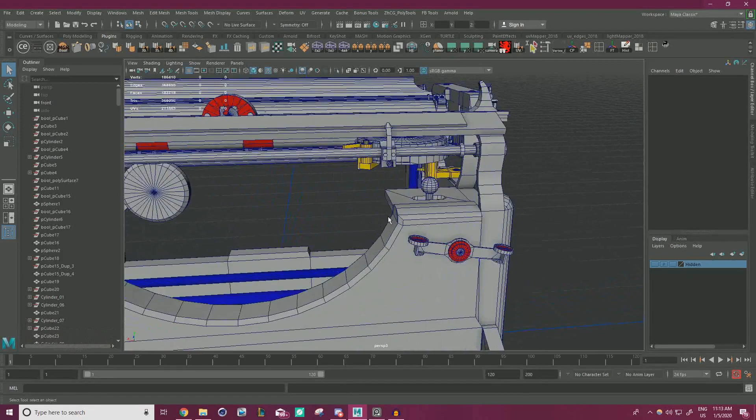We're going to be able to finish everything off on this right side, mirror it over, and then we'll call it a day. But that should keep us busy for quite a while.

So last time we finished everything that's yellow minus this top piece, as well as this circular part. We opened it up so the ribbon can slide through, and we'll get to that in just a second. But we also finished all these connection pieces over here, and as I was looking into some more reference, it looks a little bit more complex. I like how it has these different parts breaking into it, so I'm going to do a little improv to get these shapes back in here.

I'm going to keep this tube the way that it is. I'm just going to add additional parts where it would naturally be connecting. So let's go ahead and do that. I'm just going to duplicate that, scale it down, because it's very simplified, and I'd like to add a bit more complexity so it seems more believable, like there's more mechanisms going on. So let's move our pivot down here and snap this down.

I'm essentially just adding pieces to make it look like there's more going on. I don't want this long tube to be lasting too long through everything, so I'm going to pull this down, getting this sort of layered effect. Ours is going to be a little different, but that's okay.

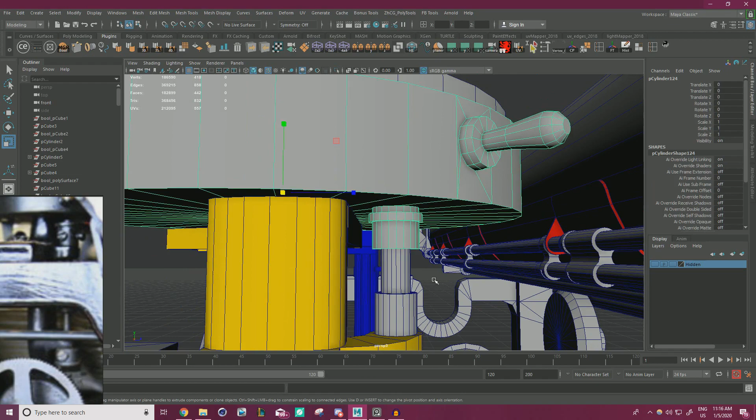But yeah, let's get back to this guy. So I just want to add these little screws in, and then there's something similar at the bottom, so we can just reuse this. And then we'll move back on to the next part.

But for this, super simple. We're just going to add some booleans, and then plug them with some screws.

So let's snap this so it's level. Rotate it 90 degrees. And it doesn't really have to be perfectly in the middle or anything, so I'm not going to add a cut. The middle height wise, that is.

Let's put one at the bottom, duplicate, rotate. For this one, I'm going to shrink it down, just to add some variety. And just sort of find another place where it's nice to line up.

Something like that. I'm making sure they're going all the way through so I can just add stuff to both sides. I'm going to combine these before we do a boolean, just so we only have to do it once. Let's freeze all our transforms and history on these guys.

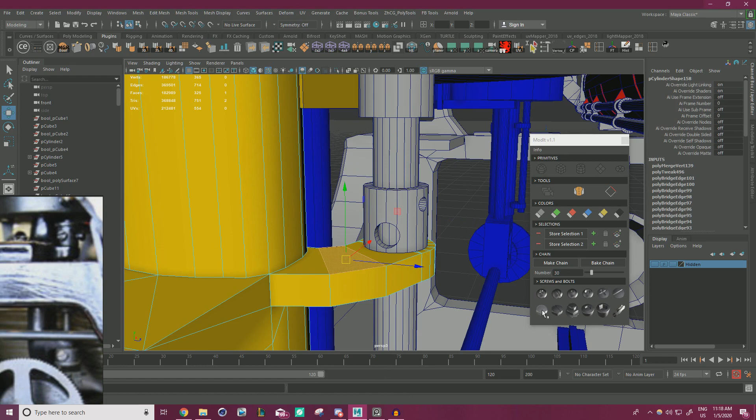Let me just find a place to put these. I might just go for something like this, just because I know it's different and I can extrude it out a little bit. I'm going to rotate that 90 degrees.

Make it red so we don't forget about it. Just snapping it to various vertices to make sure it's totally centered. So I have that sticking out a little bit, which I like. We can just duplicate that with a Control D, bring that to the other side, and rotate 180.

So this is all going to be baked down anyways, but nice. As for these guys, I'll just use a normal screw. Chances of anyone even looking at that specific piece is so tiny, so I don't mind it being like this. It's nice to have a lot of repeating parts throughout, and these screws are placed completely throughout our entire thing, so it's nice to keep that consistent.

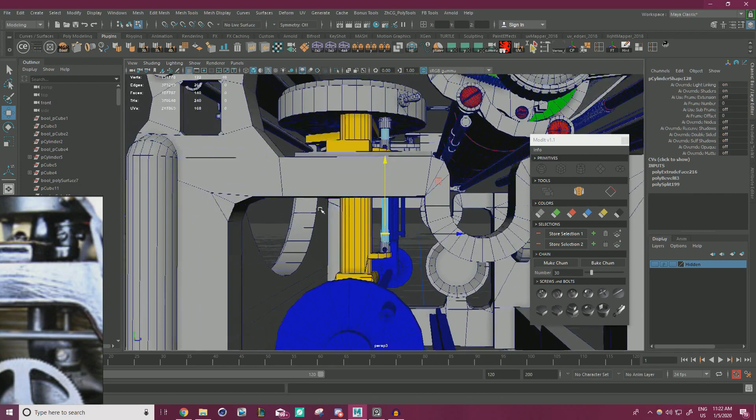And then yeah, just to make it a bit more interesting, I'm gonna add a cut about halfway, bevel it, because you can kind of see it here. But there's like a thicker part to it, so I'm just gonna extrude that. I kind of like how it looks extruded in with a minus 0.05. Something along these lines. So I'm going to keep it like that, and we're going to call that part done.

Let's go ahead and move on to this contraption. So referring to this guy again, it just kind of seems to be this sort of metal piece that hooks around, holds this turny piece, and has like the ribbon feeding into it. So obviously that's a bit simplified, but we can still work with that. Like this, for example, seems to be set up pretty properly. So we can just kind of have a curved piece that just stops here, and then these guys are just resting on top. So that's simple enough to put together.

Just trying to think of the best way to do that. Delete this piece. Pull this guy in a little bit, and then we can extrude it out and rotate it like 45 degrees and have it...

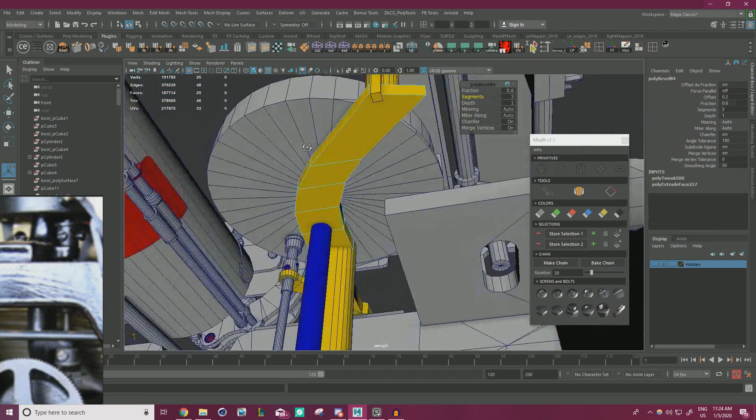I'm gonna bevel this. Yeah, so I want a nice smooth... Maybe that's not quite it. Let's bring this back. Instead, we could add a cut

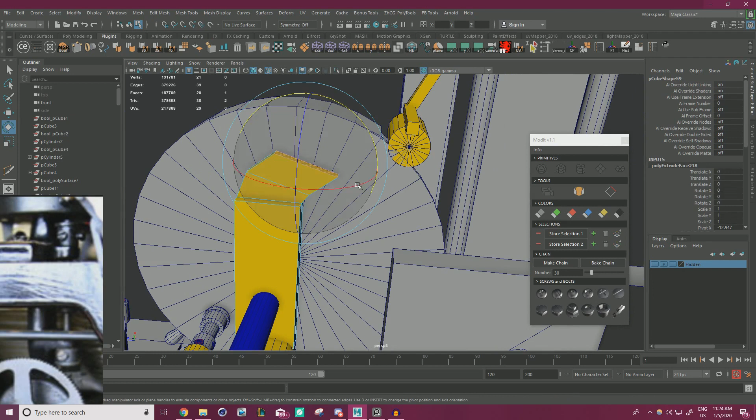and just sort of have a thin layer coming out. I'm just going to gradually move this and rotate. And I'm just trying to see what's going on here. So that's kind of the setup they have.

But it kind of seems that this piece that's coming out is just to hold the ribbon. This rounded piece is actually welded to the bottom plate. So that gives us something more to work with.

In that case, I'm going to want this to be a lot thinner. So I'm just going to cut that again. Let's just do very chunky extrudes and rotates. And then we just kind of want it resting out here.

And of course this needs to be smoothed out a little bit better. So I'm going to go ahead and bevel these. Just sort of mess with the vertices so they're a bit more averaged out.

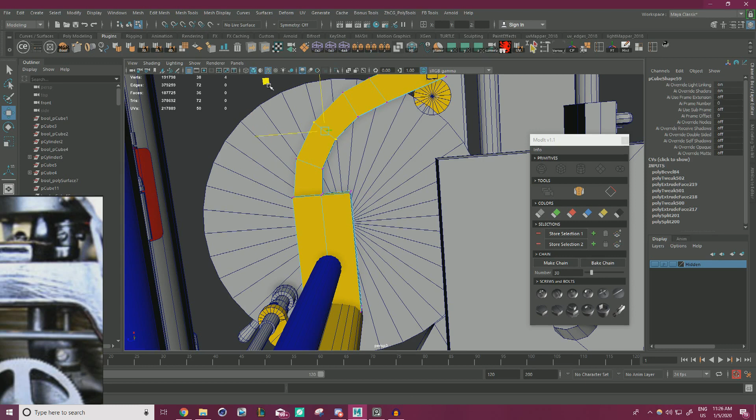Square off the end there. And this is a nice place to sort of keep, yeah, like two pieces. Let's go ahead and... we can even, if we grab these two faces and change our moving tool to, or our scaling tool to component.

Maybe not. Just trying to make this part wider. If I grab this and change it to component, it's not totally accurate. I suppose we could grab these two and hit extrude. Yeah, and that'll do the trick.

So now if we isolate this guy, so I'm just trying to have it be a bit wider at the end. Just so there's more room for everything to rest on.

Merge those guys since we have vertices just chilling on top of each other. Let's pull that in and rotate it so it's a bit more averaged. And then we can extrude that wider piece out now. Perfect. Okay, that gives us plenty of room.

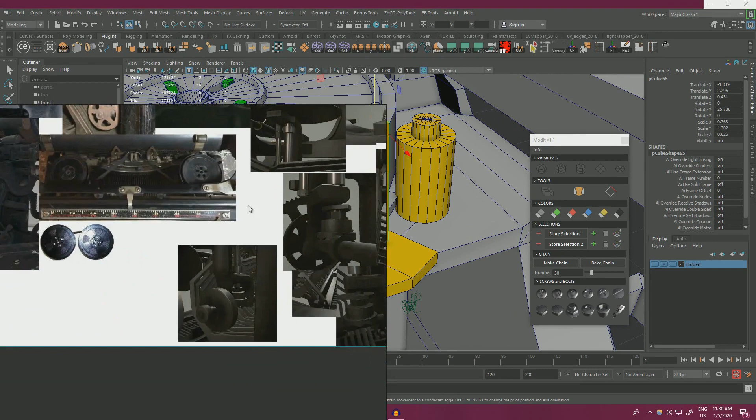Let's see if there's a clear shot of exactly. Yeah, this was one of those pieces where we kind of had to rely on that 3D model because it's so hard to see what's going on in there. That's okay, I'm just going to make it as I think would make sense.

A bit thinner, shorter, and then I'd imagine they'd be kind of tapered in a little bit. And then might even have like... oh, we got edges on this side. Weird, let's get rid of those. But maybe even a bit of a sharper shape like this, just to indicate that something's supposed to go through.

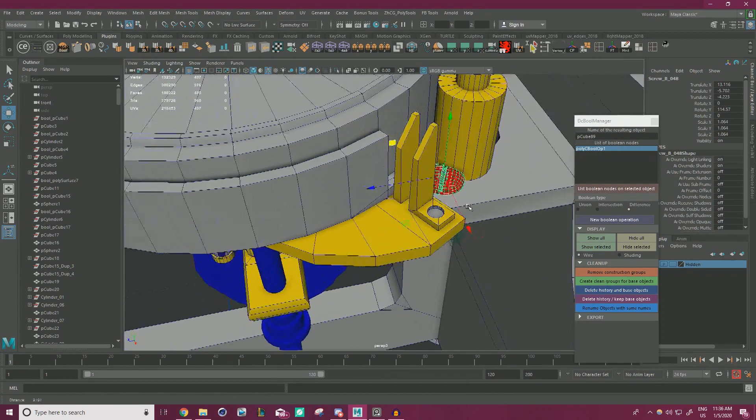I'm just going to poke face here, just so I can quickly snap this guy to the center. Save us a little bit of time. But yeah, I like how that looks, little details like that go a long way. That's why I wanted to stop and sort of set up this first part before we tackled this.

But that's that piece. Now we need the little rounded piece to be faceted on. I think the best way to do this, and this is of course building off of this idea, is it sort of has like a rounded piece on the bottom and the top and a piece going through. So I'm also going to borrow from that idea.

And select all the faces on the top and bottom. We can extrude this in a little bit. Delete, we're just making another pipe here. Bridge these guys through. We can sort of anchor this somewhere. I'm going to scale this down, as well as the inside.

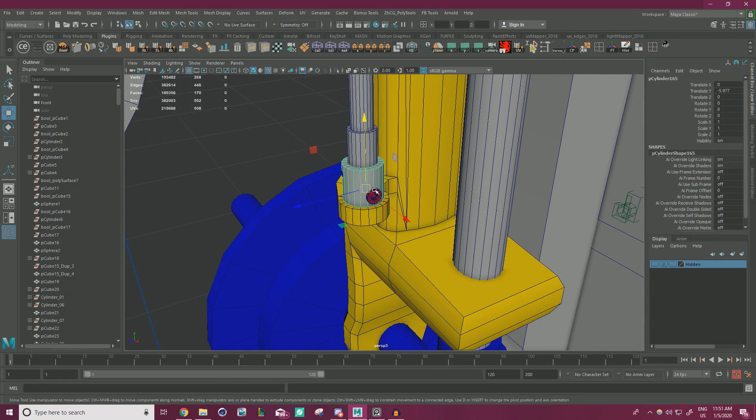Should be able to just copy this over. Let's put it in a group, and by putting it in a group, we can grow and shrink it as one.

So I'm just going to snap it to the bottom, unhide that, grow it like so. And let's rotate it a bit so it's not the same.

I'm also going to grab these bottom faces and extrude them with a rotation to sort of match this bottom angle.

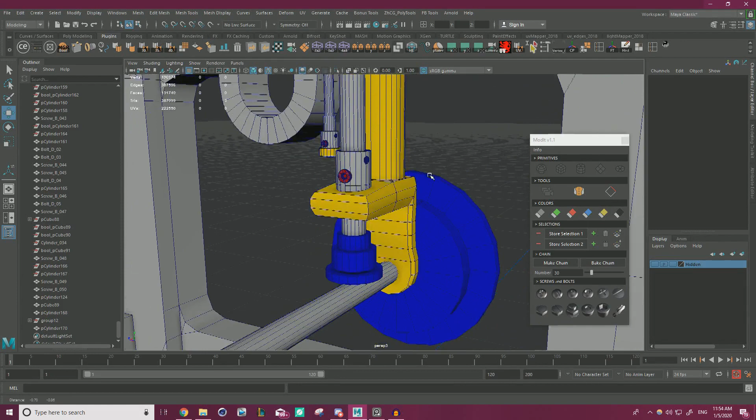This guy seems like it was a bolt, so I'm just going to borrow this bolt. I'm just making a bolt and connecting it all the way through.

A good way to do this is to just bridge and then delete the middle, and select these two guys so I can snap this to the middle.

Yeah, the 3D model I'm looking at had a bolt here, which is easy enough, so I'm just going to put a bolt there.

They have this one as just a large piece of metal, but this is another one of those cases where I'm like, okay, this is clearly a simplified version of what it should be, so let's give it a bit more visual interest.

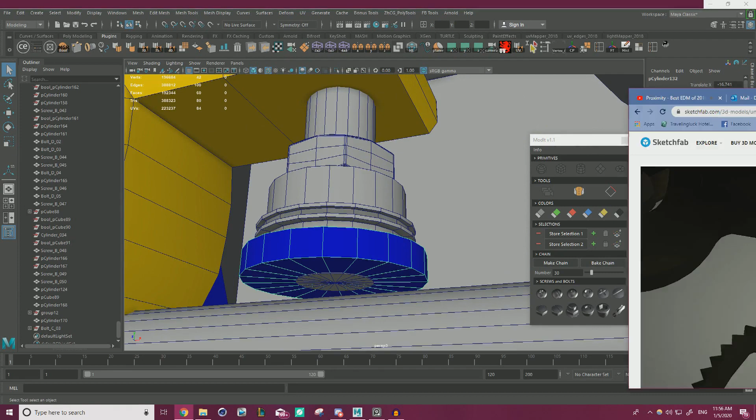Looking at how this guy has it set up, it's like some sort of gear mechanic that's going on. Like, yeah, you twist this, which rotates this. That all makes sense, so we're gonna have to make something similar to that.

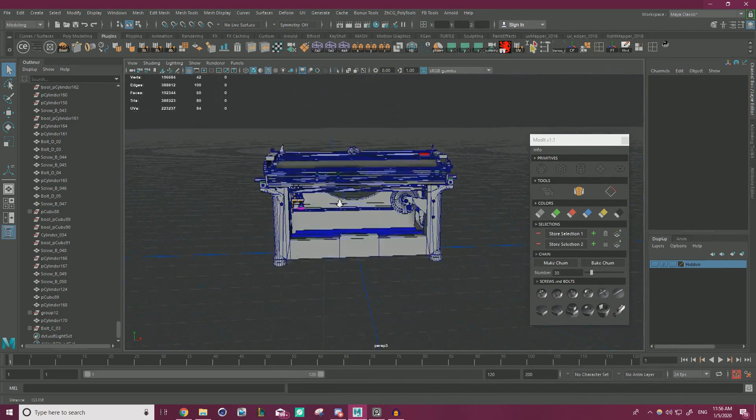Spiky shape, we might have something to borrow from for that. I guess this is rotating horizontally rather than vertically, so it's not really the best case, because the way that they have it set up is just like literally every other one being pulled down, which we could do, but I kind of want to build off of that a little bit more.

What I'm going to do is bring in a new cylinder. No, let's delete that, let's bring in a new cylinder. Yeah, with 28 sides, I want a bit more geo for this. Actually, screw it, let's just go create polygon primitives, cylinder.

Give it 36, 36 subdivs. I'm going to snap it directly where the other one is, but delete the other one. Let's get this guy into position.

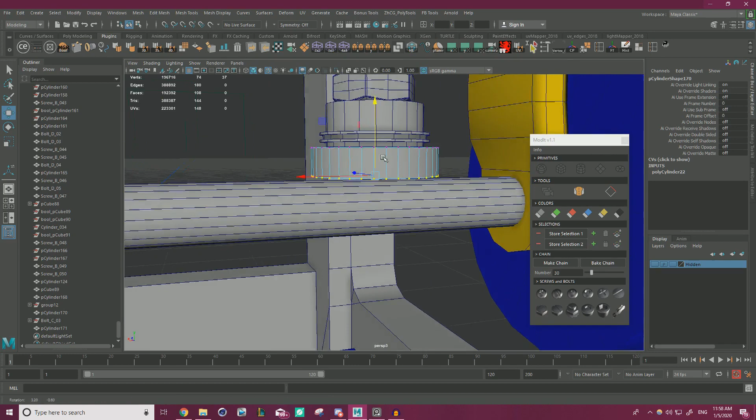So what I'm thinking for this is we could hollow it out. I'm just extruding the bottom and scaling it, pushing that up. Now we can select every other edge. I have to say, this is something you can do in Max that I was just shown by a coworker how to do - select every other edge, and I find it really useful. I know there's definitely plugins for it in Maya, but I'm surprised there's no default feature for that. I'm just essentially grabbing all those and rotating it a little bit, just because I think that looks a little too uniform.

But I don't know if that's any better. If I turn off wireframe... maybe just a little bit. We'll go with that. We'll shrink it down though, so it's kind of hugging the shape above it. Pull it up. Let's give it kind of like a ring around the lip, so I'm just adding an edge, flattening it out.

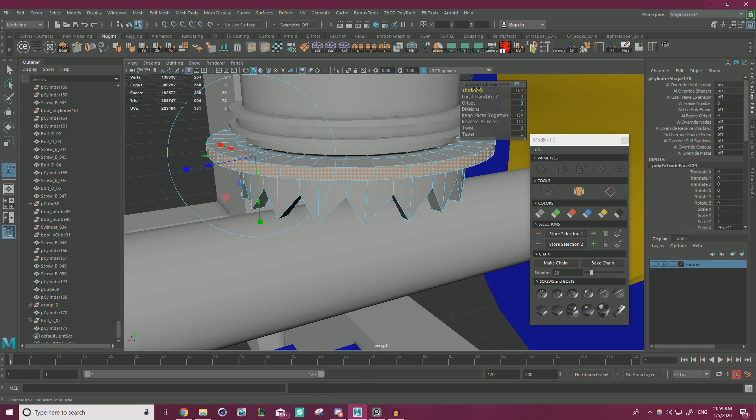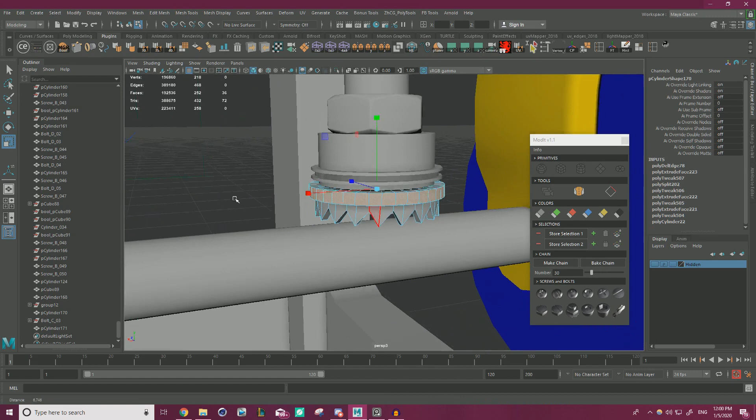Control delete to get rid of that. Kind of like the look of that. It kind of looks like it's acting as a safety mechanism, like it's harder to get your fingers down into the sharp bits. Just make it red so we don't forget about it.

Yeah, and essentially we just have to duplicate this guy over, put a corresponding one close to it. But I think we're gonna have to scale this one down quite a bit - which doesn't really work with gear logic. It kind of has to be the same size, doesn't it? Let's get it back to the correct size.

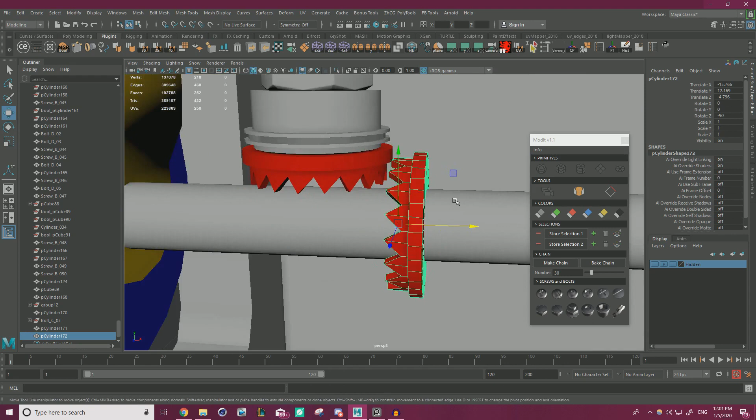Yeah, if we shrink them together, that should work. I'm also just going to push this up - I still like it hanging out the bottom. No one will ever see that, but that's okay. Yeah, and this is what I mean - now there's actually room for everything to fit into one another.

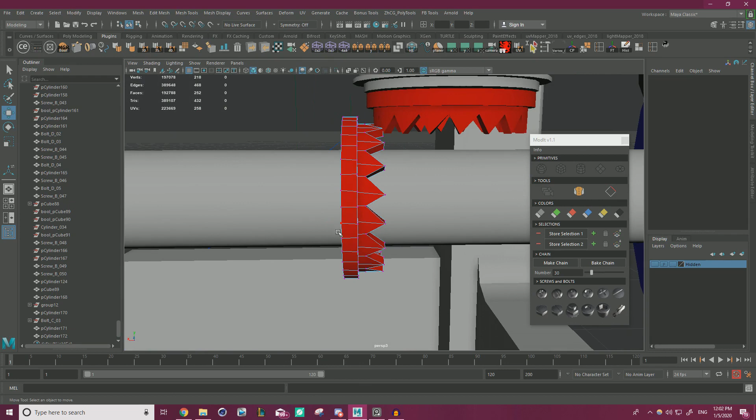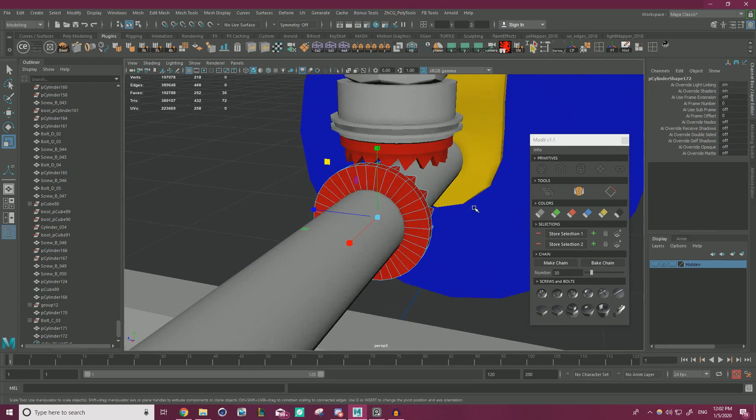With this, I kind of also - let's go into our side view. Kind of want to just select these teeth and pull them out a bit more. And then we can even extrude it all closer. Okay, I can work with that. It's definitely not my favorite, because I'm not exactly sure.

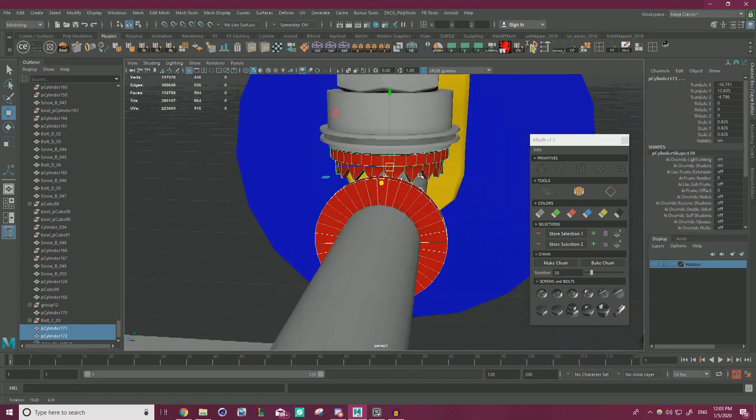It doesn't seem the most accurate, but we'll go with it for now. I don't even think you can see that piece unless you're looking through this grill. I think that's the only way you can see it. So I'm not too concerned with it, but if it does pose to be an issue, these two pieces are pretty isolated and not attached to anything, so it's a quick fix. At the very least, what I want to do is cut a hole through it.

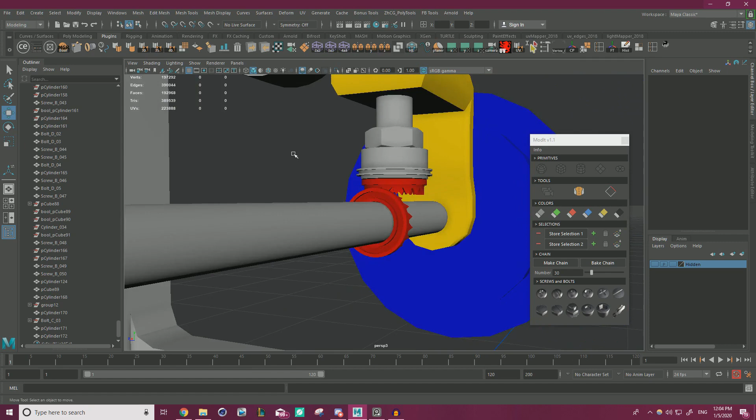Gotta make sure this is actually letting it go through. Nice. And then we have a lot of surface area here, so let's break it up by kind of beveling this in or something. Yeah, that looks a lot better.

Still not perfect, still not super happy with how that turns out, but who knows, maybe it'll be so hidden away you won't be able to tell, because realistically, even when you're looking at it, it's going to be this close and you can't really see the part, and even at this angle it's only going to get about this close to the camera, and that stuff's lost. You're not even looking at that. Okay, we'll leave that as it is.

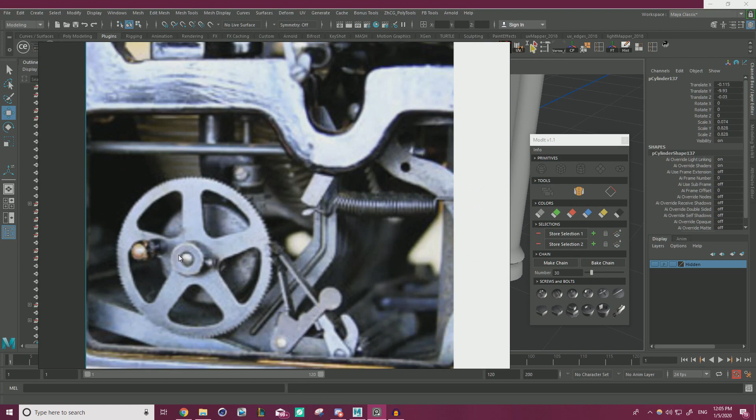We have these pieces, which should be a lot quicker, and we have actual reference for these. So this wheel is essentially like a plate and then a wheel, and the wheel has a little handle on it. This plate I've seen depicted a bunch of different ways - I've seen some of them closed off like this, and some of them more open and hollow like this. But this one definitely seems to be closed off, so we'll make it closed off, which is about as easy as a shape really gets.

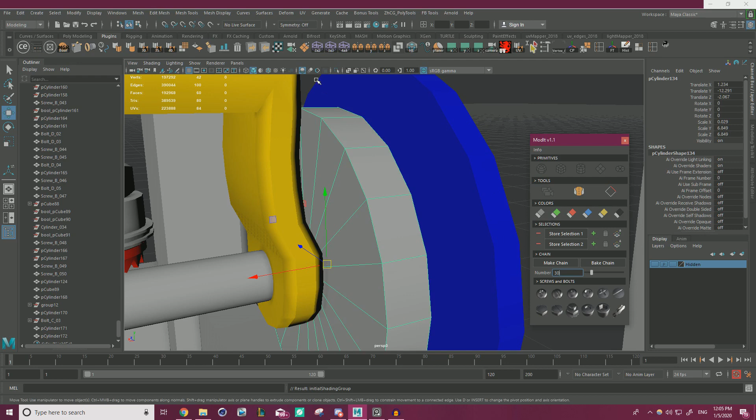So let's start working on that. Let's pull it out a little bit. It just kind of seems like a hollowed out, rounded cylinder. I'm going to bevel the end like that, and then just hollow this out. Control E, go to our scale tool. And that seems to be about it.

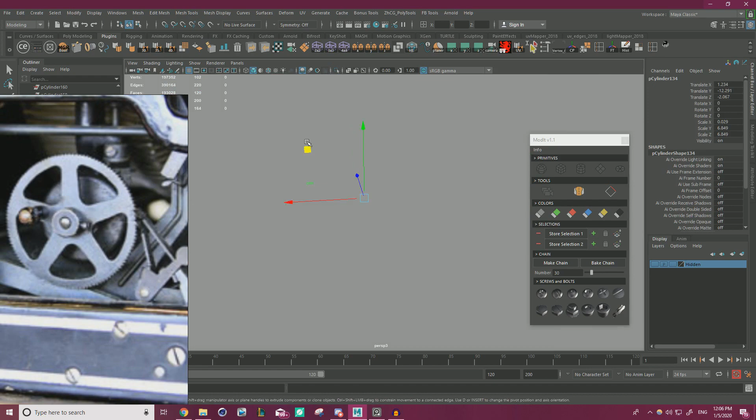Let's do an auto smooth. I mean, that's all I can really tell that it is. And then this, of course, punctures through, so let's carry that on. Just grabbing both sides, extruding, and we can bridge that.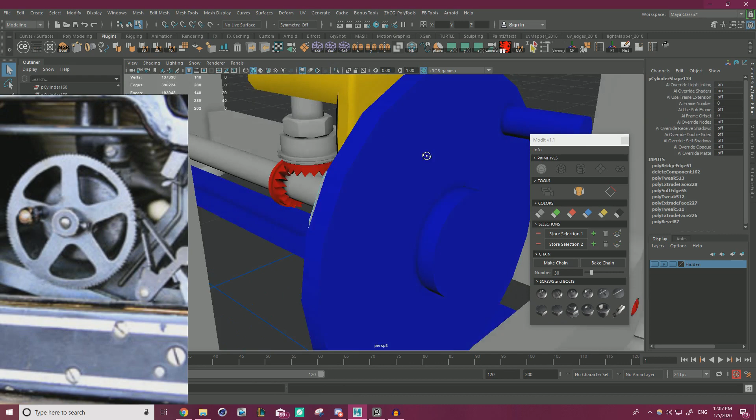Just have that going through. So that's that one. I think the other side also uses that same shape. So that's good. As for this wheel, it has teeth on it. We can borrow this—I think this is the exact same shape, isn't it? Yeah, we can just borrow this, should be the exact same gear.

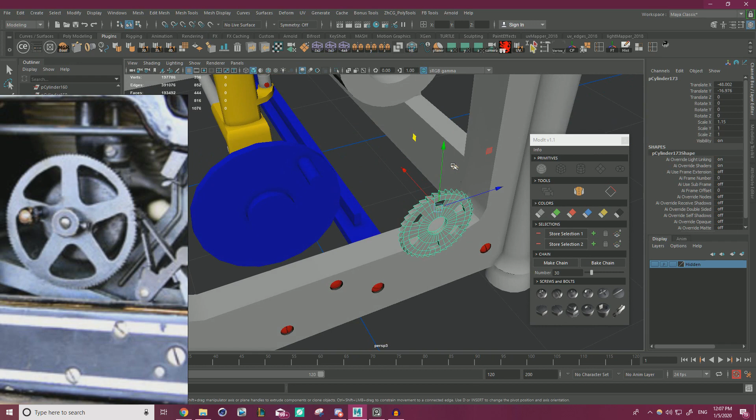This one definitely seems to have finer teeth to it. I'm trying to think if it's worth doing something like that though, because say we just scale this up, delete this guy out. I suppose it's not exactly the same. Yeah, it's different enough. I'm just trying to think of a quick way to get this pattern.

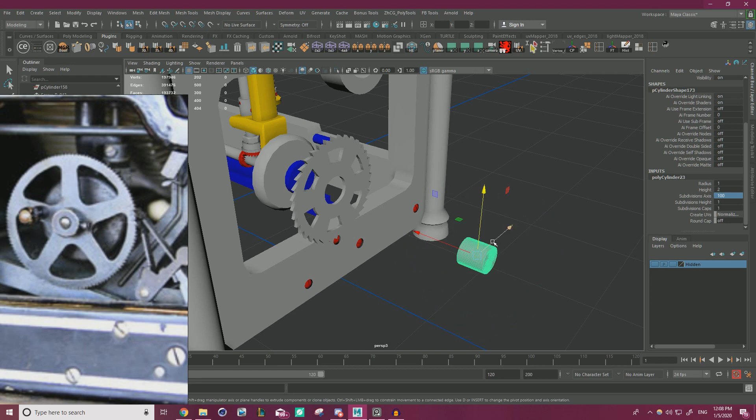I remember how we did it for this guy, it's just going to take a lot longer. So, okay, we're going to need a cylinder with a lot of subdivisions, like 100. Snap it to where it needs to be. Let's get the scale of this guy right.

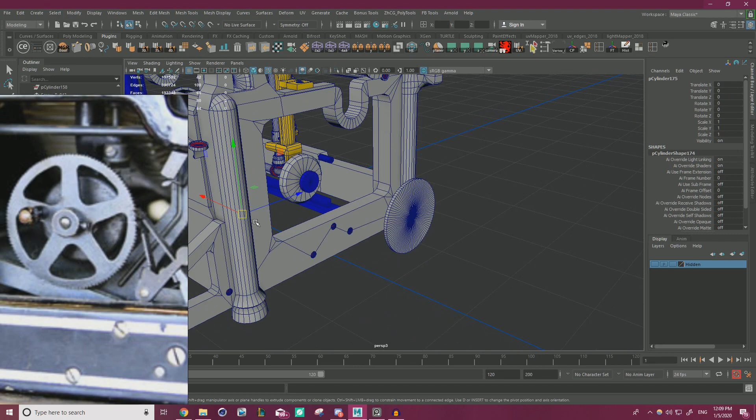Okay, so I'm not sure if you guys remember how we did it before, and maybe 100 is not even enough subdivisions, like 150. Yeah, and of course it's going to mess up. Okay, let's get a new one in here. Let's do 150. Really, it doesn't even let me rotate and scale it. Weird. 150, and then we move it, and then we get it in place.

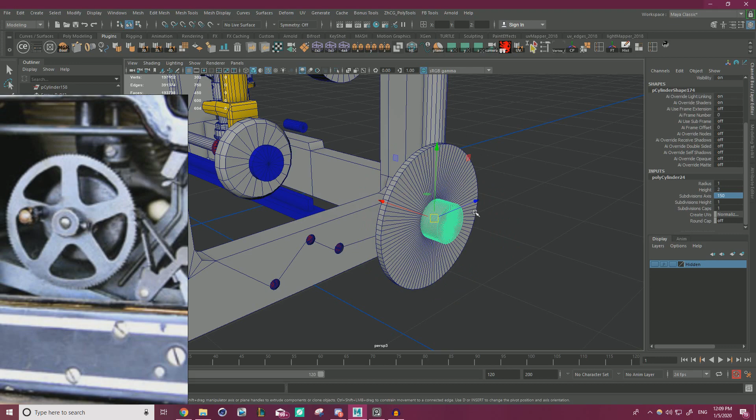Okay, so what I'm going to do is grab all the edges, hit Control E. We're going to add some thickness to it, but remember we did this before—keep faces together off. I'm going to offset it just a tiny bit so we get a bit more of a gap, minus 0.02. Yeah, that's better. Thickness can be 0.1.

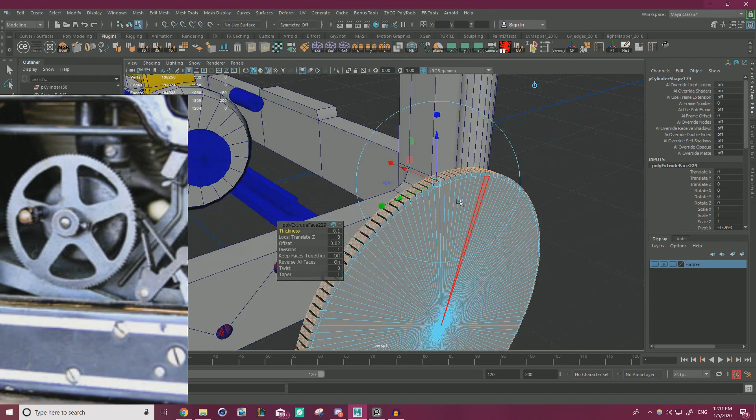Is this the same as these teeth? Let's just give it a shot, I guess. They don't seem to be curved, they seem to be extending and pointing up. I think it should be fine, it's a little short on teeth. Essentially I'm trying to find a way to collapse these.

Connect, transform component, detach, connect, fill hole, bridge, merge and collapse, merge border, collapse edge—there it is. So if you hold shift, right click, you can go to collapse edges. I'm sure you can see what I'm getting at here, and I can just hit G. Now obviously this is going to take about 20 years to do.

So we can go and just slice it in half, slice it in half again. Except for, I don't know. Yeah, I don't think 150 works for that kind of stuff. We'll have to raise it to 160, which is going to give us more teeth anyway, so that's totally fine.

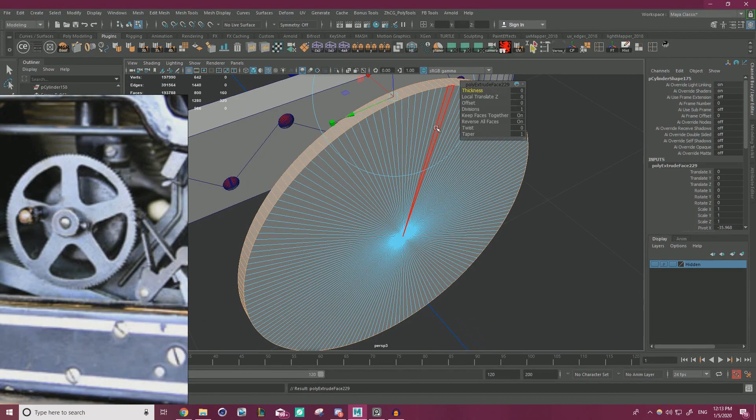Okay, let's try that again. Where we extrude, thickness of 0.1, keep faces together is off, offset of 0.01, and we should be good to find a perfect cut through the middle and turn this into quarters. Yep.

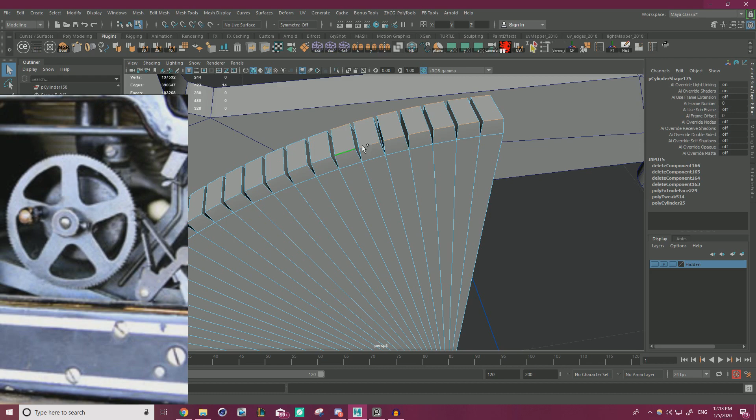Just getting rid of these hanging pieces. Now this part, I mean, yeah, we could probably turn it into less than a quarter. We could cut it more, but I'm just going to collapse these edges the way they are. We're going to have to select, what is that, 40? And I guess since they're so fine and small, it's going to be good because we can kind of just bake this down.

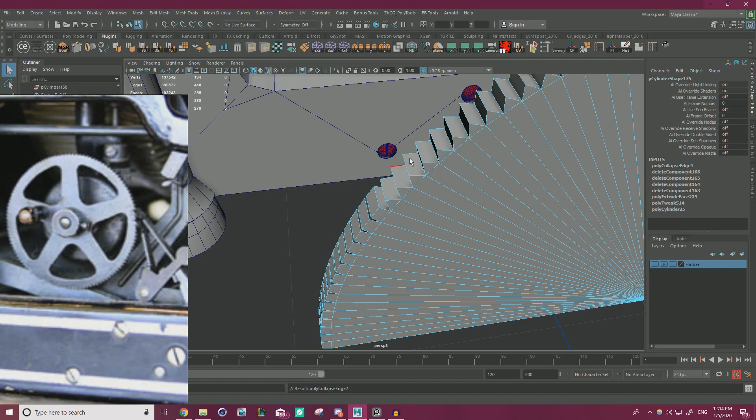Just going through, then we're going to have to hollow it out like that. Cool.

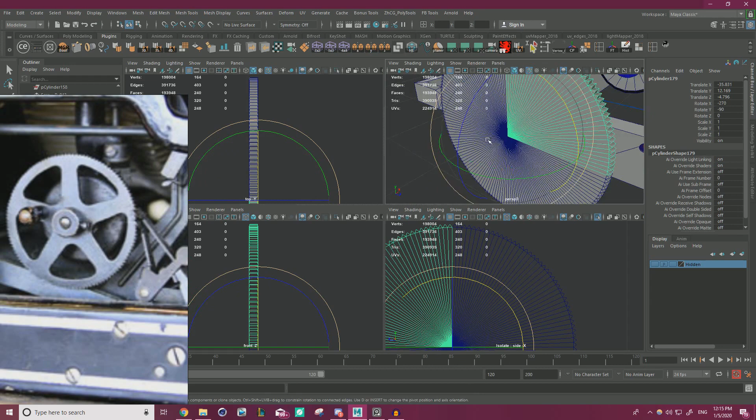I'm going to start rotating this around now. So Control D, rotate, Control D, rotate, Control D, rotate. We can now mesh combine, merge vertices.

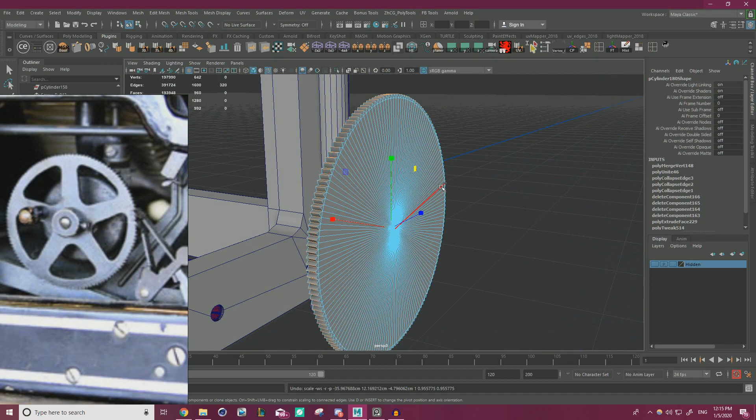And I was also thinking of grabbing all the edges in the middle, which are the points, and just—oh, I guess it would grab those as well. Fine, we can just leave that as it is. We're going to have to get these. I think the easiest way to do that would just be a Boolean, honestly, that we just rotate around pretty evenly. So many edges though, this is such a nightmare.

Let's go ahead, put this there. I have a feeling this Boolean is going to just explode. Let's get that triangular shape going on—it's kind of a fat triangle shape.

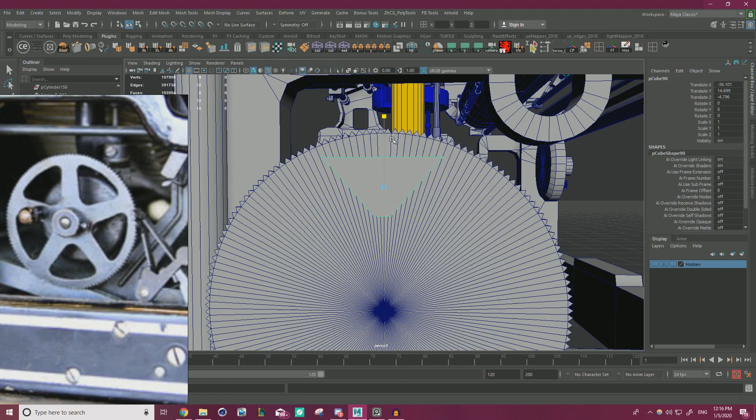I'll bevel these guys. That's already beveled, I guess. I kind of want to add a cut through here. Fatten the whole thing out.

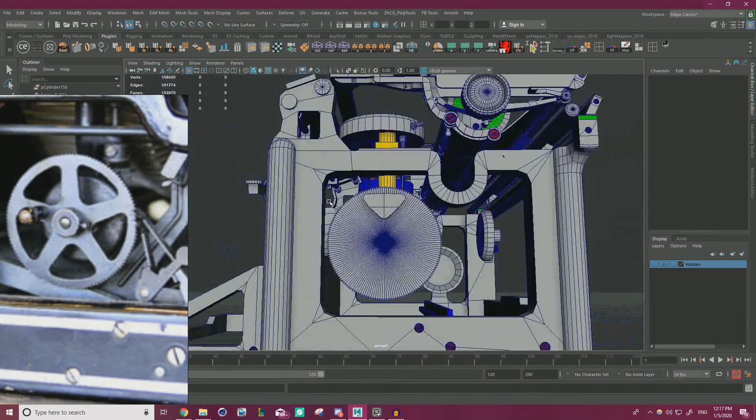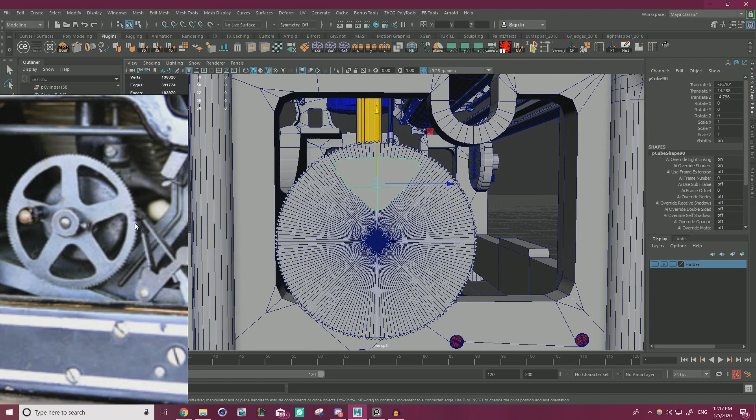And there's what, 1, 2, 3, 4, 5. 360 divided by 5, let's do some quick math here. Let's see. Man, this is taking so long. 360 divided by 5 is 72. Did we do that last time? I can't remember. Either way, we can just put our pivot in the middle.

Rotate by 72. So yeah, I'm definitely going to want to change the shape of this a little bit to sort of accommodate for that. Let's shrink it and then pull that in a little bit and round this out. I'm going to even bevel that. Okay.

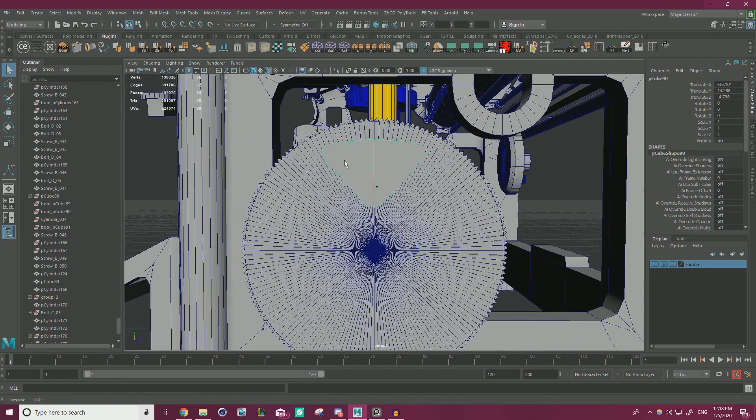Duplicate, 72. I'm looking at this and it sort of tapers off, but not to this extent. So, whoa, that leads me to believe I should adjust this a little bit. Pull this down.

Yeah, that seems to be a lot better. 72, duplicate, freeze transform. 72, duplicate, freeze transforms. 72.

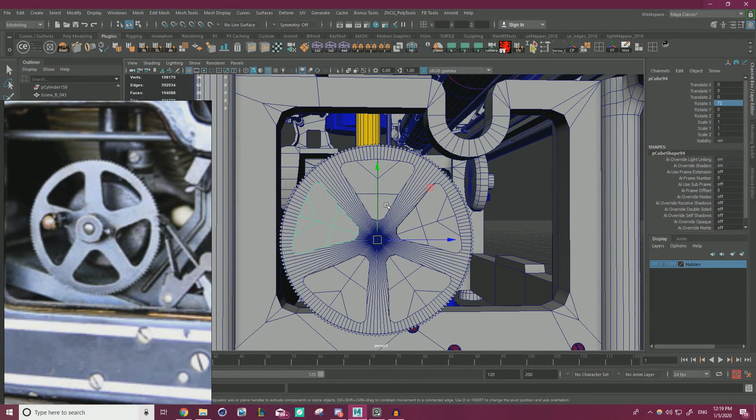Let's mesh combine. I kind of want to shrink it all a little bit, so I'm going to go back to the normal selection with our vertices selected, just sort of scale it in a bit. Bring this back to world, and then scale out so it's closer to the rim.

Let's go ahead and save before we do this Boolean, because we are dealing with a lot of edges and a lot of weird intersecting geometry. So let's quickly save, and let's hope that my computer doesn't blow up. Freeze transforms, delete history on both these guys. New Boolean operation.

I still think we can make these guys smaller. And then I want to grab the verts in the middle, scale them in a bit. Then maybe grab all the verts on the edges, scale them out. And let's grab these middle ones and play with them a bit as well.

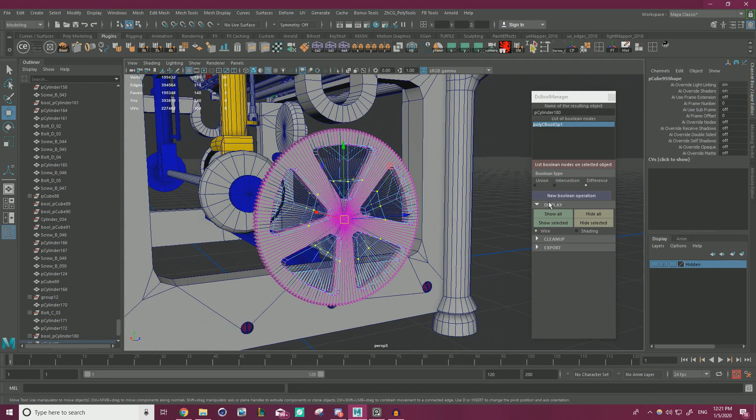Kind of want to shrink them down. That's what it was. Okay, so now we can delete history and base objects. It's kind of gotten us the shape that we're looking for. Not really though, okay. Really quickly, I like the actual shape of them, but I still think it's too big.

I was just Control Z to get back into it. Let's just shrink this all down. And then go to Object. Just trying to round it out at the edges a bit more, and then I think that'll be it.

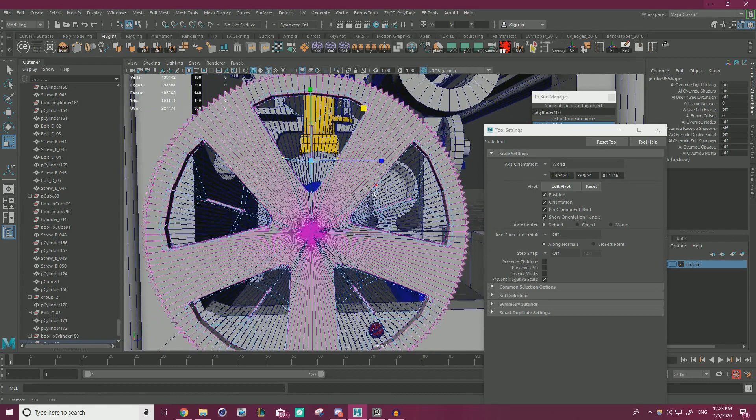Grab these secondary ones. I also think the tip is a little too fine, so I'm going to grab these secondary ones. I suppose these guys would probably be more in control of that. Yeah, we can make the ends a bit fatter this way. Okay, let's delete history.

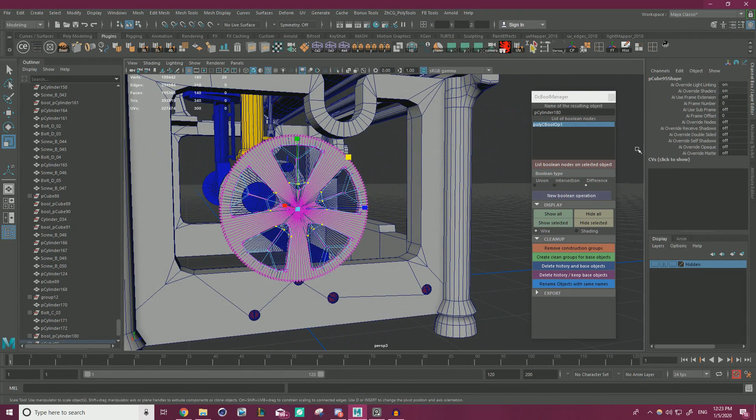Something weird is going on here. Let's delete that. Okay, so we have our shape. Cool, if we smooth it out, it's a little bit crazy right now because of the edges, but it's definitely gotten us most of the way there.

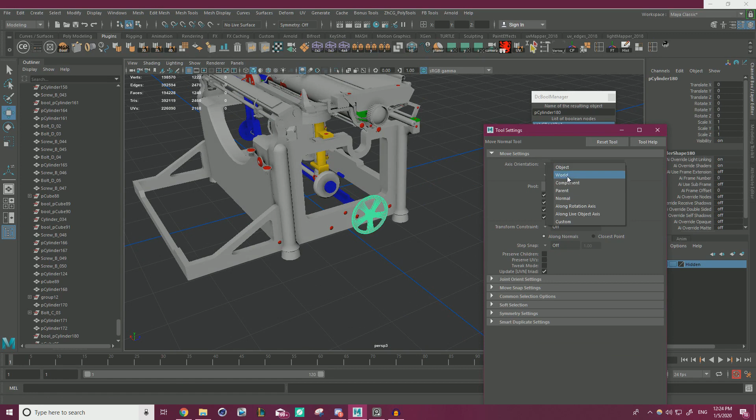Okay, cool. Now we sort of have to give this handle, this little connection piece, and we're good to mirror everything over.

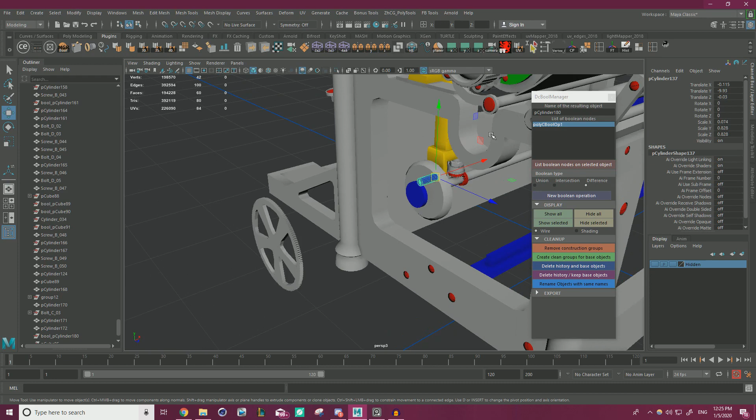So this should be pretty easy to throw together. First we need to puncture a hole through the middle so that it can go into the pipe properly. Just going to make sure it's the same thickness as this. So yeah, we have more than enough room for that.

And then we also need a little puncture for the handle to go through. So this one I'm going to make a bit smaller, just put it up here.

Combine these two. Freeze transform, delete history on all these guys. Do a Boolean difference. Delete history and base objects. Nice.

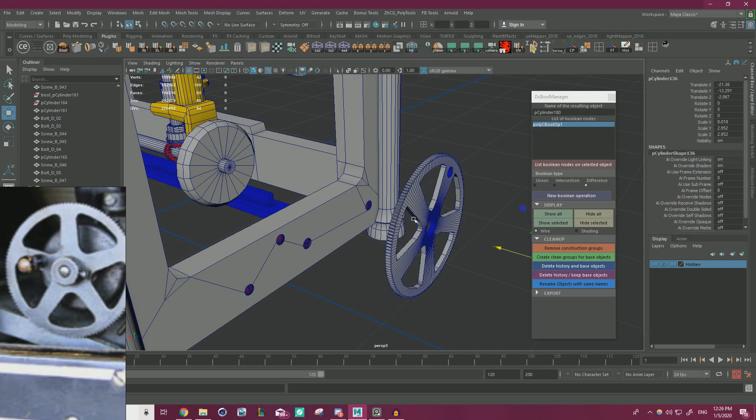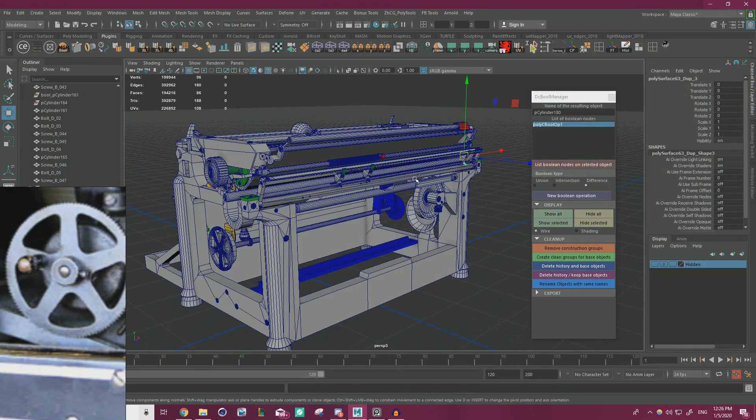Let's just get rid of this for now, so we can slot this into place. As for that handle, just like this guy, we can just borrow it from back here. I like how we're at that point now where we have all these parts that we can just sort of reuse.

I'm going to poke face back here. And this is good if you're ever doing any different projects to sort of save some of these super reusable pieces, because you never know when you're going to have to make something with little nubs like this.

Just like before, I'm just going to go into a different view just so I can rotate this and get it roughly correct.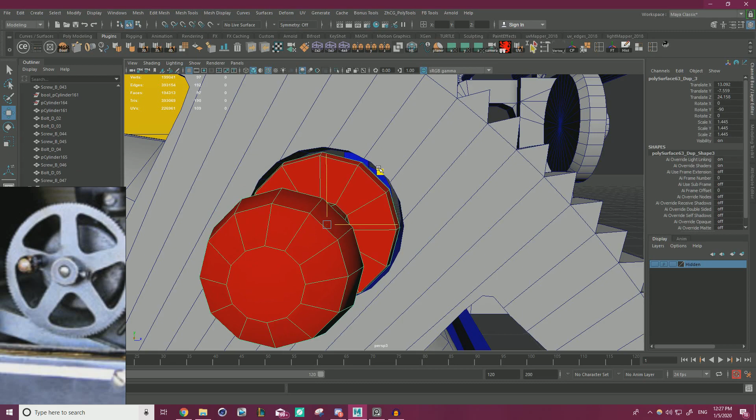Okay, nice. Let's put a bolt on the other side just to plug it up.

Cool, that's that piece. It does have this little cap thing on the end. Kind of just looks like something covering the very end.

So let's extrude this through and even give it a bit more of a taper than normal. And then it just kind of seems like a pipe housed on the very end.

So we've made a bunch of those this episode. I'm just going to bridge that through. Nothing new.

Excuse me. And I can just extrude that down. Dramatically change this size. And make this smaller so it matches it a bit. Let's get rid of the blue.

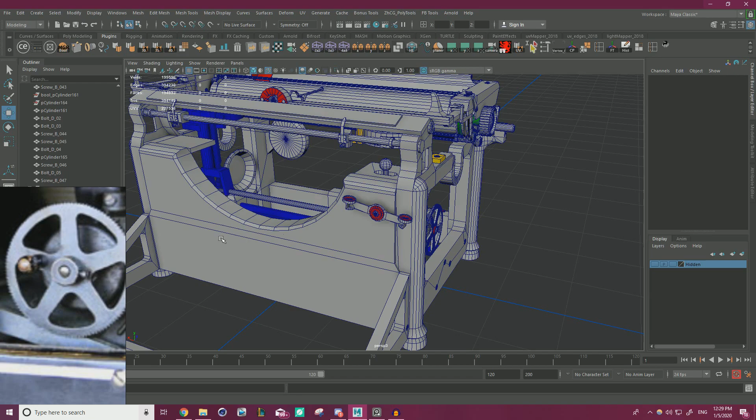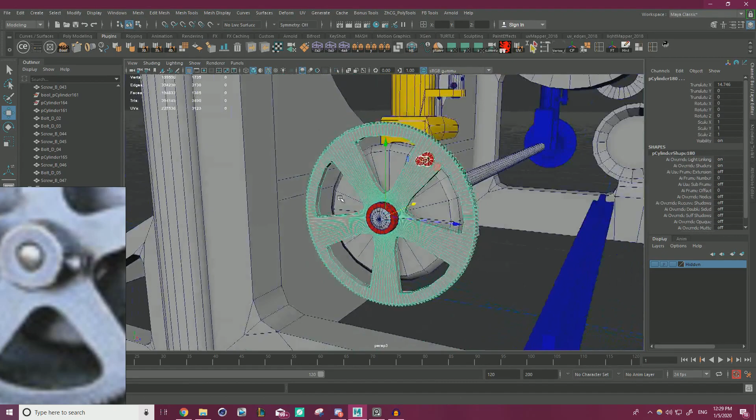Let's see, kind of has this sort of screw sticking in there. You know me, I'm a sucker for these small details, so I'm going to throw it in. Let's push this forward so that we can give this guy a bit more space. Yep, let's get a cylinder on there.

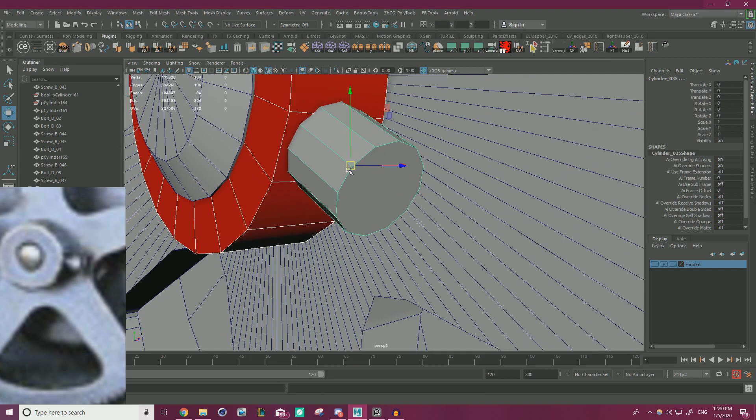Cool, got a cylinder on there. Let's change our move tool to object so we can pull it out a little bit. Freeze transforms, delete history. New Boolean operation. Cleanup, delete history and base objects. Suppose we could probably push this a bit further in now.

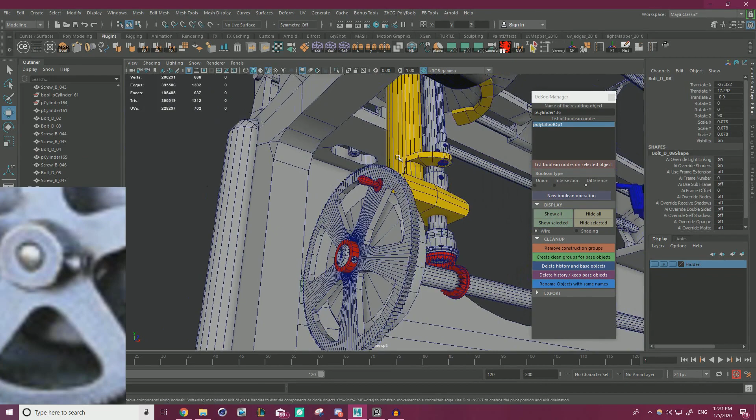I just didn't want it puncturing through, that's all. Let's sort of nuzzle a bolt in there. Let's go with one of these guys, because I want it sticking out a little bit. Rotate it 90 degrees this way. Guesstimate how many it goes this way. Stick it out.

This is definitely one that I'd forget about if I didn't change the color, so let's make it yellow. Cool. Let's mirror this guy over. And that should more or less be it.

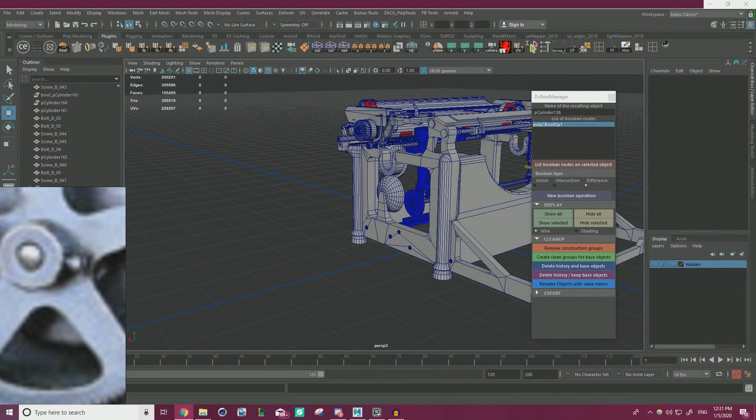Yeah, it should be symmetrical on both sides. The only difference is this sort of ring seems a little bit different. It honestly seems like most of them on the other side that we haven't done yet have more of this shape, which is what we made already. So I might just have it that way to sort of differentiate it. Or at the very least, it's smaller and seems to be rounded. I'm just going to go with the one that we've already made.

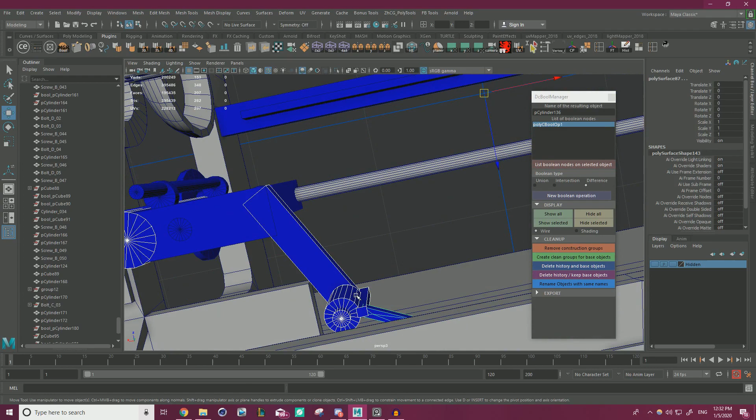But yeah, let's go ahead and delete all this placeholder stuff. I like when we can just duplicate everything over and save a lot of time. Okay. The hardest part here is just going to make sure we don't miss selecting anything.

Yeah, I feel like we definitely accomplished a lot in these last two parts. This went by a lot faster than I expected. Leave no bolt unselected.

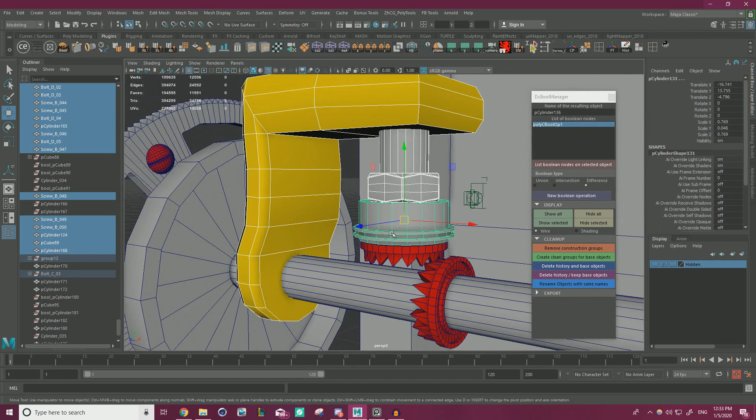Okay, working our way through. We don't need to duplicate the pipe, obviously, it's continuing throughout. Alright, and the way that I'm going to do this is just Control D. So it's a copy of everything, hit Control G, and it's going to put it in the middle.

And I'm just going to do scale -1 on X, and that should duplicate it all over. Right, the pipe isn't perfectly centered. Oh, and we did forget something. We forgot this guy.

Well, I guess I didn't really have to do that because we're going to delete that anyways. Oh, man. Let's have this ring on the end.

Freeze transforms, delete history. We'll have this sort of be like our end cap. Bevel that like we do on the other side. And then tuck it in a little bit.

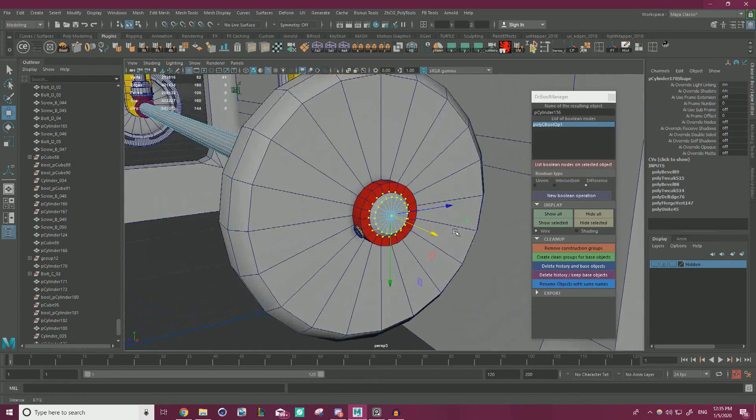Nice, that looks good. I will say there's a bit of a difference where in the 3D model here, this side is covered like so, and then on this side it doesn't have that. But in my opinion, I think they would be the same. I don't know, whoever made this probably knows their stuff, but that's such a small detail.

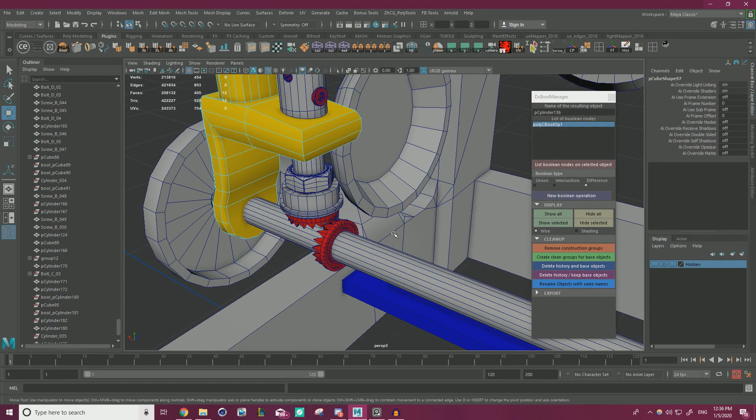I'm gonna keep it just like this, because extruding it over, like we could smart duplicate this face, flip it over. I just don't think it's really worth it. It wouldn't take that much time, but I'm gonna leave it the way it is.

I'm noticing that we didn't puncture this though, we're gonna have to do that. I'm getting really happy with how the results are turning out, so it's cool. We're making good progress. Let's actually do that and then call it a day.

We'll puncture this. I'm gonna duplicate this. Actually, I'm gonna delete that first. Let's just do it in one go. Let's combine these two guys.

And then we can duplicate this, shift select, and isolate these guys. Yep, let's freeze transform, delete history and everything. New Boolean operation, difference. Delete history and base objects. It went all the way through. Perfect. Alright guys, that's going to call it for this part.

I love seeing it from this angle now, how it's filling up. It's really cool. We're at that point now where I'm like excited about it.

I know that sounds weird, but I'm sure anyone who does 3D, you know that the whole first maybe 30-40% of something, you're just like, oh my god, I hate this. I guess that goes for art in general. But once you start to get to a point where you're like, okay, this is starting to work out, it gets you really pumped. Like I feel like if I open up the recording, yeah, this has been well over an hour and I didn't even notice. So this is super cool.